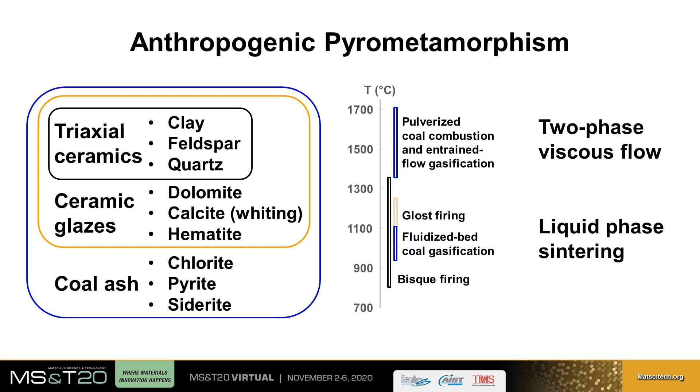Volcanologists often employ the Einstein-Roscoe equation to help explain the effective viscosity of subliquidus magmas that contain one or more solid phases in suspension. The presence of the solid phase leads to an increase in the effective viscosity of the magma relative to its intrinsic viscosity. Using FactSage thermophysical modeling software, it is possible to predict the solid phase volume fraction present in a two-phase system given the major oxide composition, temperature, and oxygen activity.

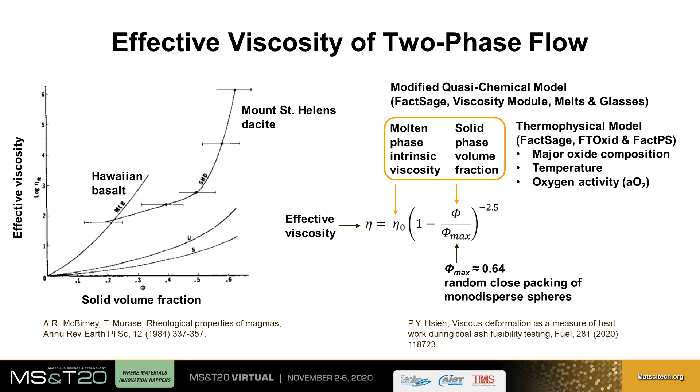The intrinsic viscosity may then be estimated using the modified quasi-chemical model based on the composition of the molten phase, also from thermophysical modeling, and the temperature. This approach to modeling the effective viscosity of subliquidus molten silicates helps to answer a very old question in ceramic engineering. How do pyrometric cones actually work?

The modern pyrometric cone was invented by Seger at the Royal Porcelain Works in Berlin, and the first written account was published in 1886. The pyrometric cone was subsequently introduced to the United States by Orton, and the first thermophysical description for pyrometric cone deformation was published by Sosman in 1913.

Sosman hypothesized that pyrometric cones start to deform at or near the eutectic temperature of the mineral mix used in their fabrication, and that the viscous nature of the molten oxide slows the cone collapse under its own weight. If Sosman is right, then pyrometric cones work by integrating viscoplastic strain over time, where the effective viscosity is controlled by the cone compositions developed by Seger through empirical experimentation.

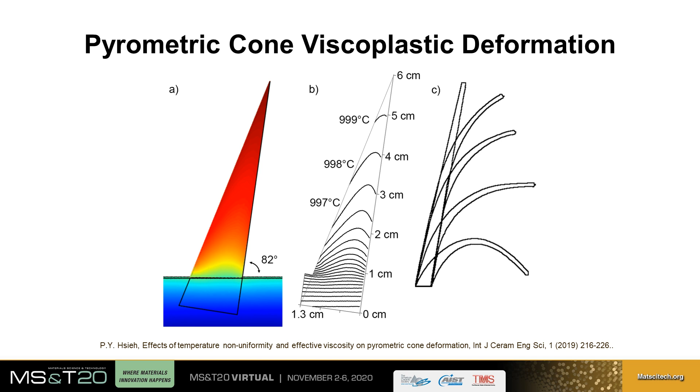In 1968, Thompson published a doctoral dissertation on the thermal deformation of glass crystal systems while a student at The Ohio State University. Thompson was concurrently a research engineer at the Orton Ceramic Foundation and wished to measure the effective viscosity of pyrometric cones at high temperatures. He did so by constructing a 3-point beam-bending viscometer, with which he measured the effective viscosity of cones 4, 5, and 6 as a function of temperature.

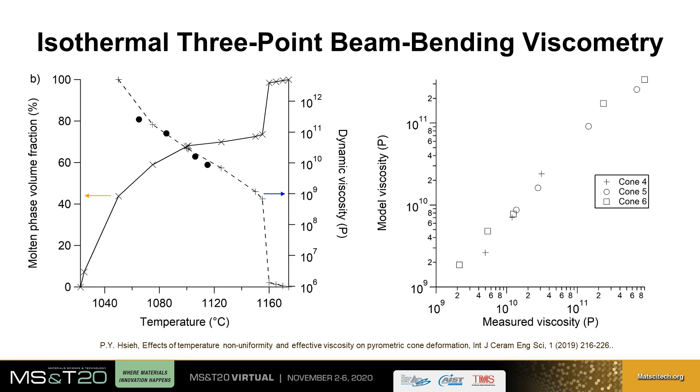What Thompson lacked at the time was access to thermophysical modeling software capable of computing the effective viscosity of these pyrometric cone compositions in a subliquidus state. Subsequent advances in computers made it possible to apply thermophysical modeling to a wide range of problems, including the estimation of effective viscosity for subliquidus silicate melts. The effective viscosity estimates found through thermophysical modeling were in excellent agreement with Thompson's experimentally measured viscosity values, lending support to the validity of the approach.

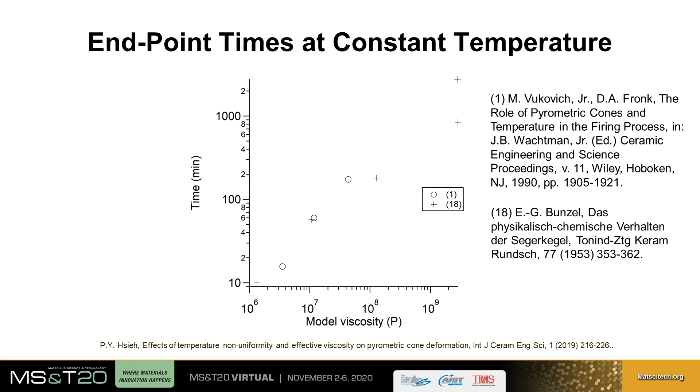If accumulation of viscoplastic strain due to gravity is the answer, then a pyrometric cone held at a constant temperature greater than its solidus temperature should also reach its endpoint through bending given sufficient time. This appears to be the case based on data from Vukovich and Fronk as well as Bunzel. The next question is, can thermophysical modeling predict the endpoint temperature of a pyrometric cone given just its major oxide composition? The answer, surprisingly, appears to be yes.

A positive linear correlation was found between the Littleton softening point temperature, or the temperature at which the effective viscosity is 10 to the 7.6 poise, and the pyrometric cone endpoint temperature. The choice of the Littleton softening point is not arbitrary, as it is typically considered to be the start of the working range for glass.

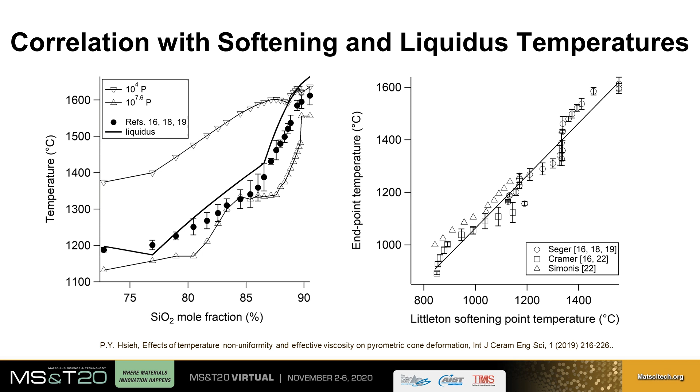It is one thing to predict the effective viscosity of pyrometric cones, which are formulated with a handful of carefully selected minerals and prepared in large batches with consistency as a key performance objective. How well does the thermophysical modeling approach work with the coal ash fusibility test, which must contend with a much wider range of mineral compositions? The coal ash fusibility test, or AFT, was inspired by pyrometric cones as a way of measuring the propensity for coal ash clinkering. The AFT critical temperatures figure prominently in the assessment of coal quality even today.

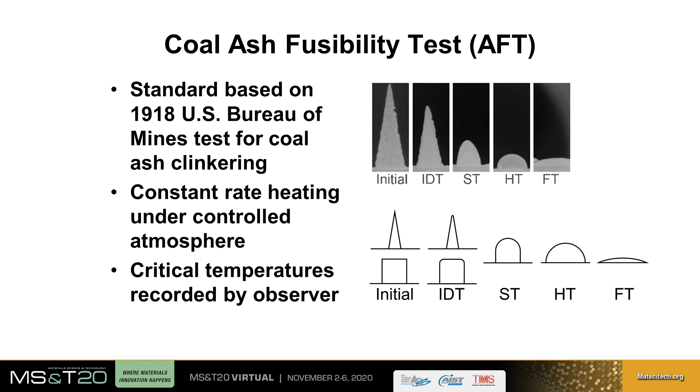The U.S. Geological Survey's coal quality database contains many records of coal ash composition and AFT critical temperature that can help provide an answer. 4726 records, which contain major oxide data and at least 2 AFT critical temperatures, were selected and analyzed through thermophysical modeling. The results suggest that a major re-evaluation of how coal ash AFT critical temperatures are used is in order.

This is because these critical temperatures measure heat work, or the combined effect of time and temperature, in the same manner as pyrometric cones. Contrary to expectation, AFT critical temperatures are not strongly correlated with the solidus temperature, but are correlated with the liquidus temperature. So what is going on here?

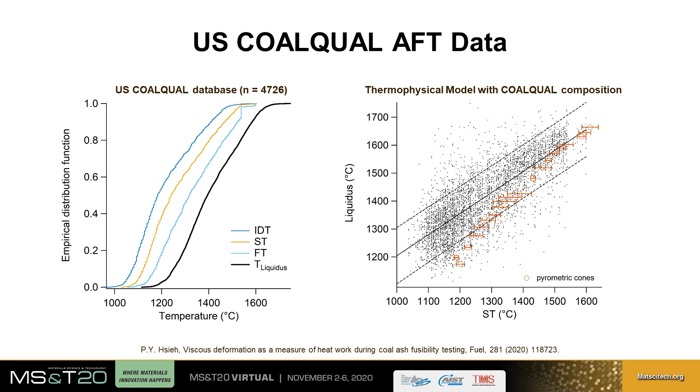A possible answer is that the Littleton softening point temperature of a coal ash mixture is just below its liquidus temperature, as suggested by prior work on pyrometric cones. There is some evidence of this when one considers the predicted effective viscosity of coal ash slags at their AFT critical temperatures. The effective viscosity of most coal ash cones lie within or below the working range of glass once initial deformation begins.

Therefore, much as was the case for pyrometric cones, the deformation of coal ash cones during fusibility testing is the accumulation of viscoplastic deformation due to gravity and surface tension over time. Interestingly, the temperature distribution at the Littleton softening point correctly reproduces the bimodal distribution observed in the initial deformation temperature from the CoalQual database. This is probably not a coincidence.

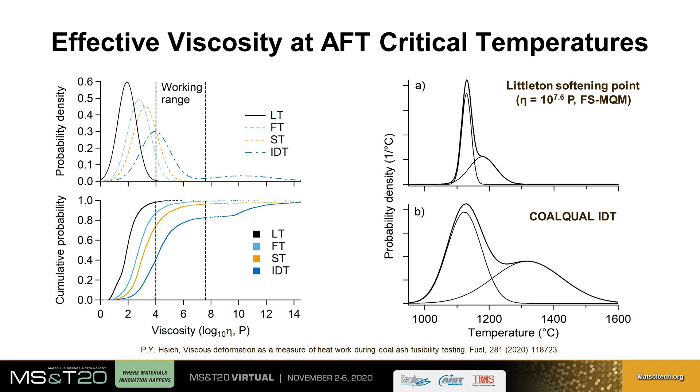But, to be sure, the modeling approach was checked in the lab through high-temperature rotary viscometry with two synthetic coal ash slags, a high iron slag and a high silica and alumina slag. The same slags were also subjected to AFT measurements. The results for the reducing atmosphere case are shown in these two plots. Since no significant difference in AFT results was observed for the high silica and alumina sample, only data on the high iron sample will be shown on the next slide.

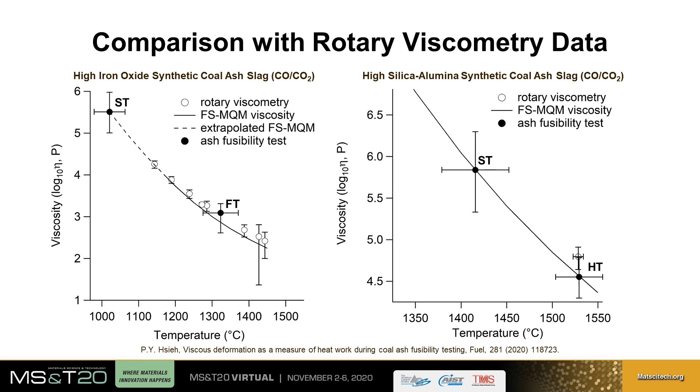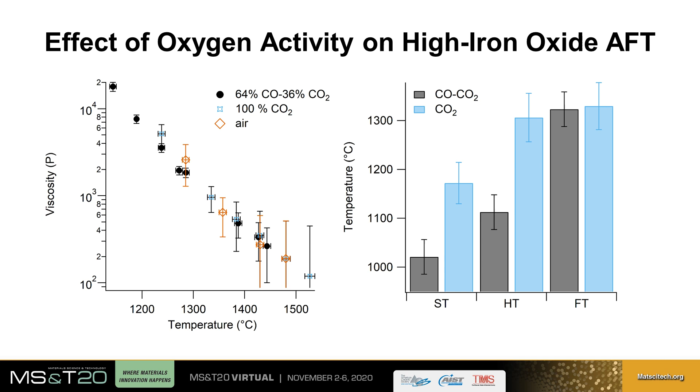Rotary viscometry of the high iron slag was repeated using a carbon dioxide atmosphere and again in air. An increase in viscosity at 1238 and 1285 degrees C were observed under inert and oxidizing conditions, respectively. The softening temperature and hemispherical temperature were also significantly higher for the high iron slag, which means that the slag is much more viscous and less prone to undergo viscoplastic deformation at lower temperatures compared with the same slag under reducing conditions. This is consistent with the non-bridging oxygen per tetrahedron model of silicate melts that is often encountered in both materials engineering as well as earth and planetary science.

Iron oxide exists in both a divalent and a trivalent state. Iron 2 oxide acts as a network modifier and reduces the viscosity of a silicate melt by increasing the number of non-bridging oxygens. Iron 3 oxide acts as a network former. Consequently, oxygen activity plays an important role in determining the effect of iron oxide on coal ash slag viscosity. However, that's not all that can be said about iron oxide.

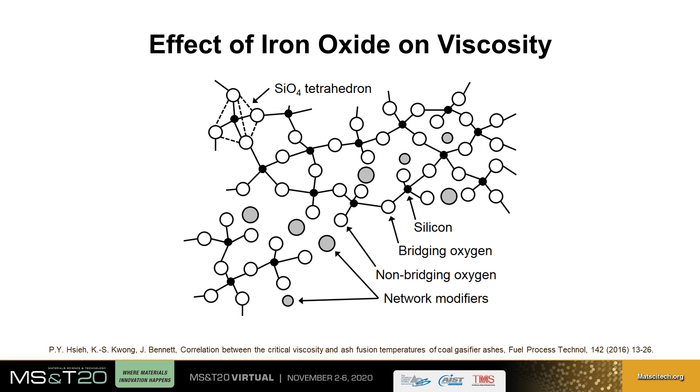Researchers in earth and planetary science have reported a miscibility gap in the molten silicate system where silicon-rich and iron-rich phases separate. To account for this liquid-liquid immiscibility, the thermophysical modeling in this study was done with a two-phase slag instead of treating the molten phase as being uniform in composition.

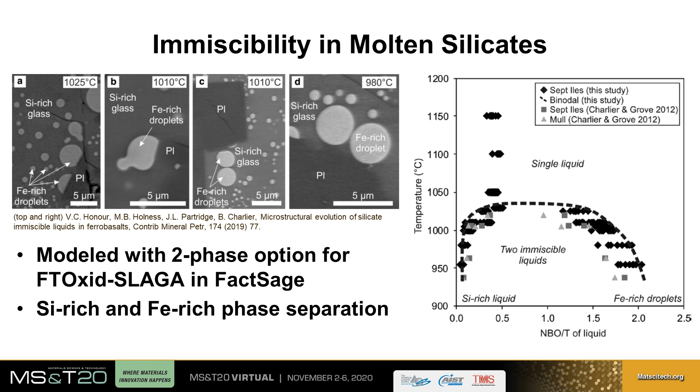The modeling results suggest that a phase inversion between the silicon-rich and iron-rich phases may lead to an abrupt discontinuity in the effective viscosity of the molten silicate phase above the liquidus temperature, where no solids are present. While phase inversion has been observed for oil and water emulsions and water and oil emulsions, the discontinuity in viscosity as a function of temperature has not been verified for molten silicates in the lab, at least not yet.

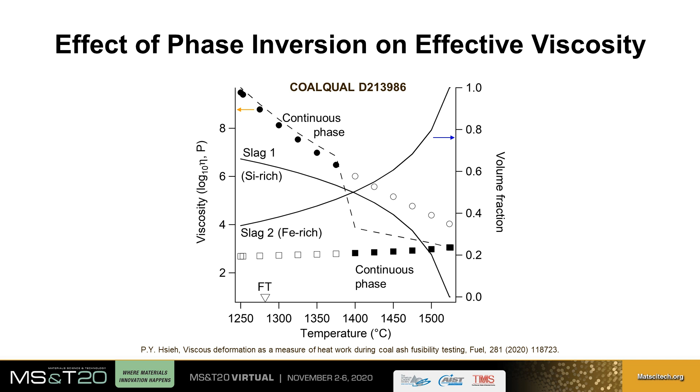To summarize, pyrometamorphism in petrology is consilient with pyroplastic deformation in ceramic engineering and coal ash fusibility testing. Next, thermophysical modeling is useful in predicting the effective viscosity of partially molten silicates. Lastly, iron oxides play an important role in determining the effective viscosity of molten silicates, not only through its role as a network former or modifier, but also due to immiscibility and liquid-liquid phase separation.